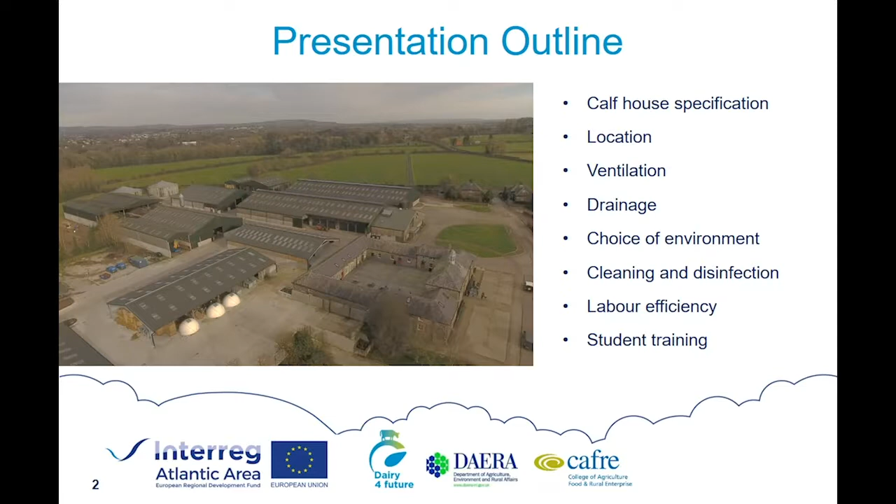This evening, I would like to talk to you about the design of the new CAFRE calf house and the post-weaning heifer house. My presentation will cover the specification of the CAFRE calf house, where and why it is located in the farmyard, the ventilation and drainage within the house, the choice of environment available to the calf, cleaning and disinfection, labour efficiency measures incorporated into the design, and training of students in the new calf house.

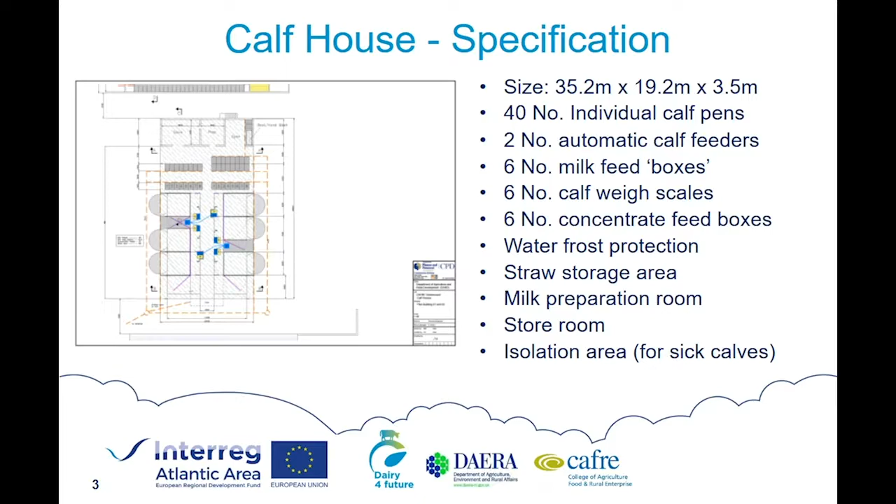The calf house has dimensions of 35.2 metres long by 19.2 metres wide, with eaves height of 3.5 metres. The specification includes 40 individual calf pens, 2 automatic calf feeders, each servicing 3 milk feed boxes and 3 concentrate feed boxes. Each milk feed box is also equipped with calf weighing scales. There is also a straw storage bay, a milk preparation room, a store room, and an isolation area for sick calves.

Turning to ventilation. Ventilation in calf houses is critically important to remove disease-causing organisms from the calf house to minimize the risk of disease infection. Good ventilation also removes excess moisture, keeping the calf house dry, which also reduces the survival of disease-causing organisms.

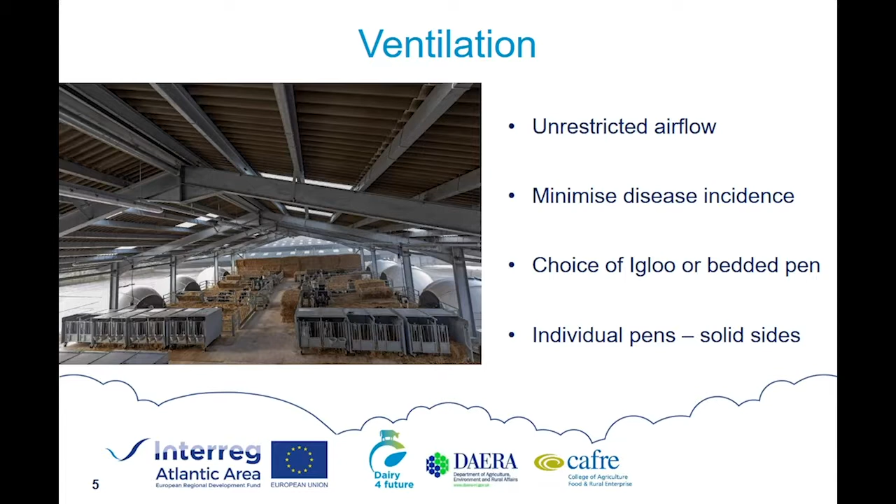The igloos are designed according to the manufacturer, so that wind blowing over the igloo creates a negative pressure at the highest point, drawing air out of the igloo through the ventilation outlets that you can see on the top. The ratio of the size of the inlet area at the front of the igloo to the size of the ventilation outlets on top is designed to result in slow, draft-free air movement within the igloo. From having released smoke pellets in the igloo and watching the smoke movement, the effect appears to work as described.

In the second presentation tonight, my colleague Aaron Brown from AFBI will discuss some of the ventilation issues found in calf houses on local dairy farms participating in the Optihouse research project.

The deep straw bedding that you can see in the slide also provides calves with the opportunity to nest into the straw, creating a localized microclimate for itself. In addition, calf jackets also give the young calf additional cold tolerance protection.

Calf jackets have been researched by AFBI, Teagasc and the AHDB, evaluating whether jackets improve calf health or performance. The research in general indicates no significant impact on calf performance or health, but what the local AFBI research did show was that calf skin temperature was approximately 6 degrees higher for calves fitted with jackets, indicating that fitting calves with jackets for the first 4 to 6 weeks should help calves manage cold weather conditions. However, where calf jackets are used, provision must be made for cleaning the jackets before reuse to avoid disease spread.

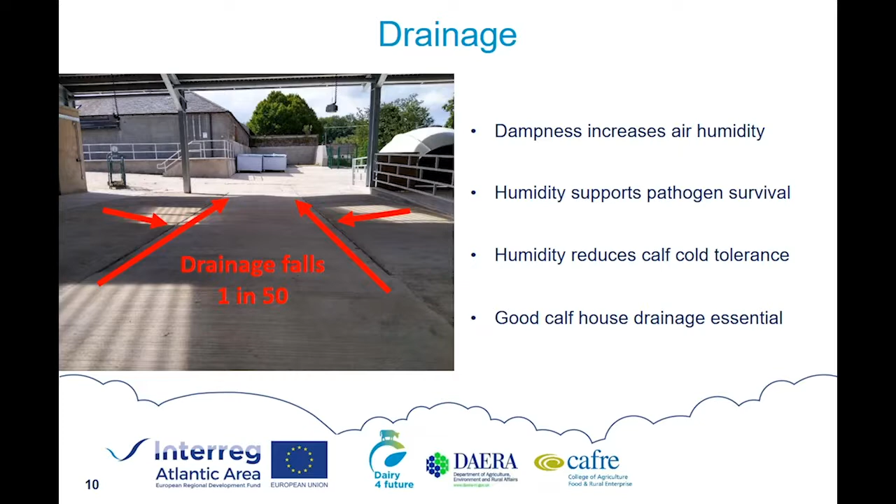The image on the screen shows the concrete floor area of the calf house where the individual calf pens are positioned. A 1 in 50 fall has been created from the back of the calf pen to the front, indicated by the arrows pointing from left to right and from right to left, with a further 1 in 50 fall from the centre of the calf house to the outside.

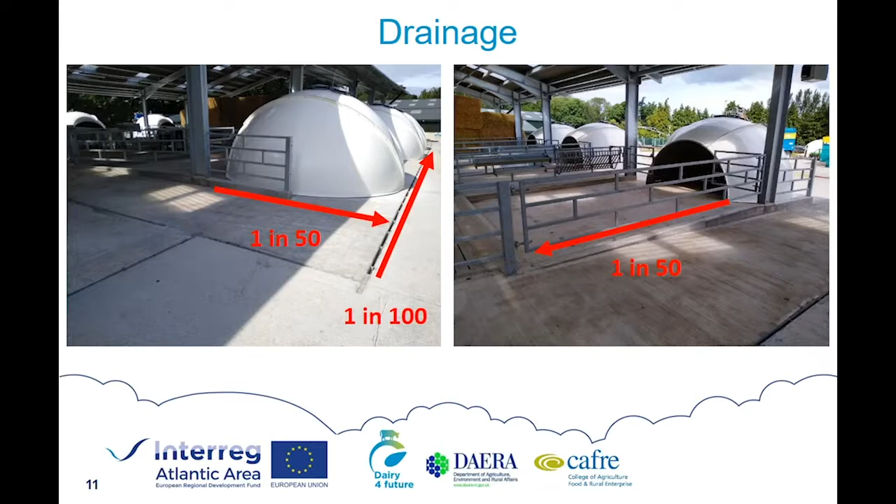Within the igloo pens, there is a 1 in 50 fall under the igloo, with a drain placed just behind the igloo to catch any dirty water runoff. There is also a 1 in 50 fall from the front of the igloo through the bedded pen area.

This fall drains liquid towards a shallow slurry channel at the front of the pen, which is covered with 2 metre wide slats, raised 150 millimetres above the bedded pen floor. This gives a solid concrete curb against which the dirty bedding can be loaded when the pen is cleaned out. Holes are drilled at 500 millimetre intervals to drain the liquid to the slurry channel. The channel has a fall of 1 in 100 along the length of the calf house, and the slats have a narrow 15 millimetre gap width suitable for young calves.

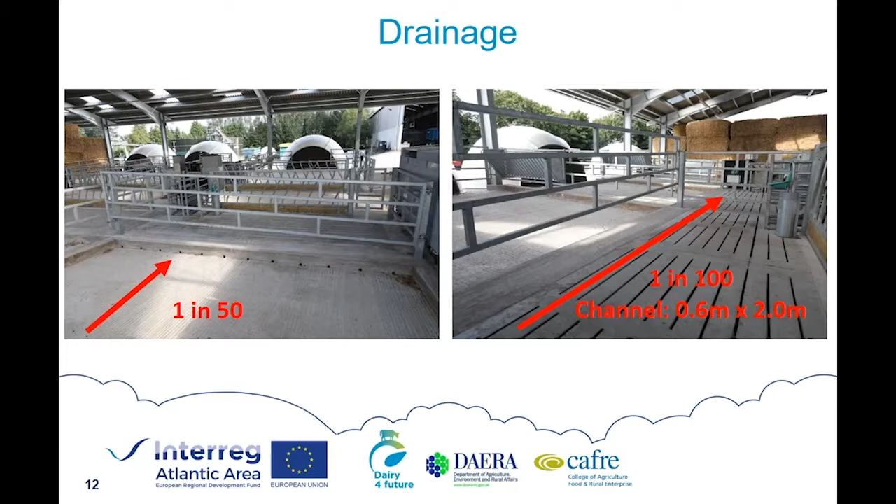Past experience indicated that the dampest area of an automatic calf feeder house setup is around the milk feed boxes. For this reason, the automatic calf feed boxes are located over the slurry channel slats to keep the pen floor areas clean and dry.

In terms of cleaning and disinfection, all calves are placed in individual pens for the first 7 days of age to allow the calf to be fed its dam's colostrum for 4 to 5 days before it is transitioned onto milk replacer. More information will be given by my colleague Alistair Boyle in the second of our series of webinars on calf feeding.

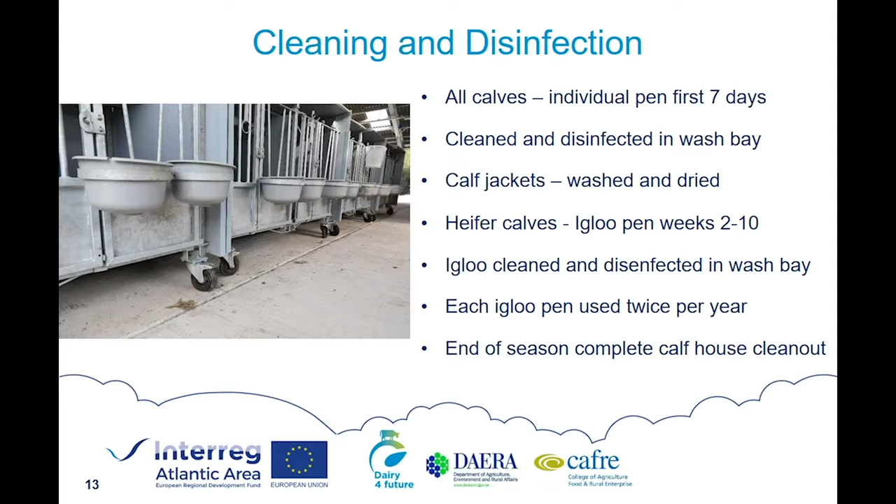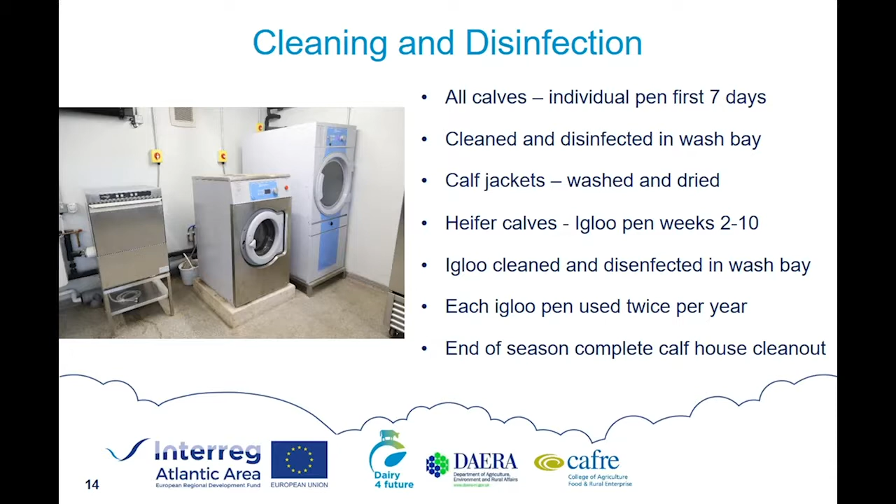Replacement heifer calves stay in the igloo pen from weeks 2 to 10. They are weaned off milk replacer in the igloo pen and ideally stay in the igloo pen for another 1 or 2 weeks post-weaning before being moved to the post-weaning cubicle house. After each igloo is emptied, the igloo is lifted out of the house using the hook you can see on top, taken to the wash bay and thoroughly washed and disinfected before being returned to the calf house.

The dirty bedding is removed using a farm shovel and taken to the midden. The concrete floor under the igloo and bedded pen is then thoroughly brushed out. At this stage, the pen is not pressure washed to avoid wetting the rest of the house. Each igloo pen is generally used twice during the calf rearing season. At the end of the season, the house is completely cleaned out, disinfected and rested again before the new calving season. On farms with year-round calving systems, design provision would need to be given to creating a break period when calf housing can be thoroughly cleaned and disinfected.

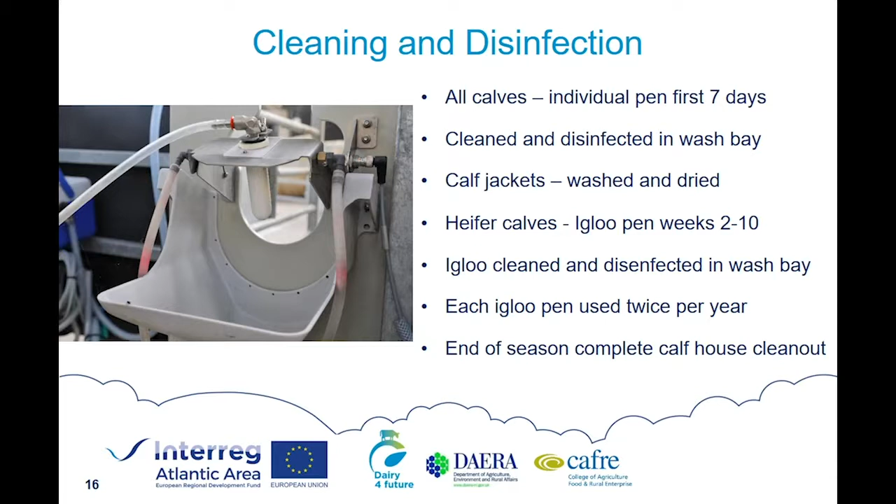Additional hygiene provisions specified in the design of the calf house include automated milk replacer teat cleaning, which you can see on the slide, and an industrial washing machine for washing milk bottles. Stainless steel sinks and flexible tops have also been provided to make it as easy as possible to clean milk buckets and water bowls, etc. Hygiene and its impact on calf performance will be discussed in much more detail in the third of our series of webinars with data again from the AFBI Optihouse research project.

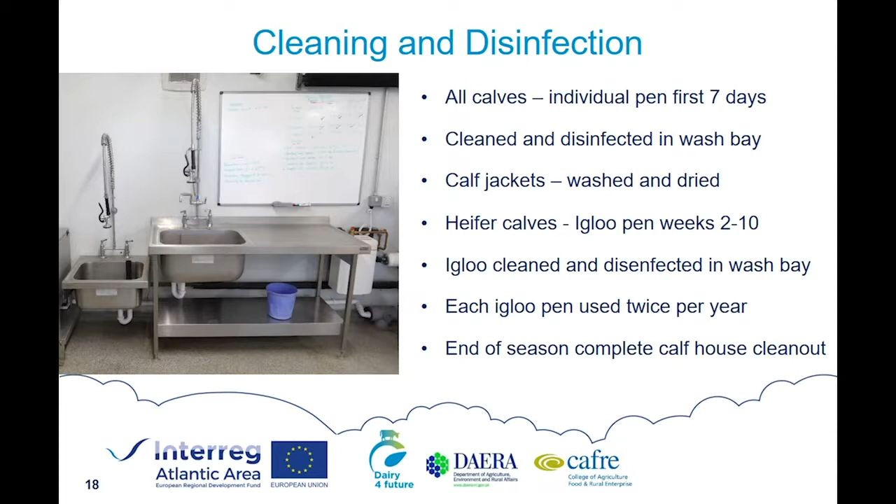Turning to the subject of veterinary medicine storage, vaccines are a big news story at present for obvious reasons. For the human coronavirus vaccines to be effective, they must be stored and handled correctly at specified temperatures. The same applies to cattle vaccines. CAFRE has a strict vaccination protocol to protect replacement heifer calves against pneumonia, which will be covered in our third webinar in early December. To store our vaccines correctly, we have installed a small wall-mounted medical fridge, which you can see in the image on the slide. Alongside it is a lockable medicines cabinet to ensure that we meet our quality assurance standard responsibilities.

Going forward, all calf treatments will be recorded in new dairy herd management software, accessible to students and staff through smartphone apps. These electronic records will be much easier to use and to review with the college vet to assess where we can improve our disease management practices going forward.

In terms of labour efficiency, calf rearing can be a time-consuming aspect of dairy herd management. This new calf house has improved labour efficiency on the CAFRE dairy farm in a number of ways. Firstly, by bringing all the young calves into one location on the farm.

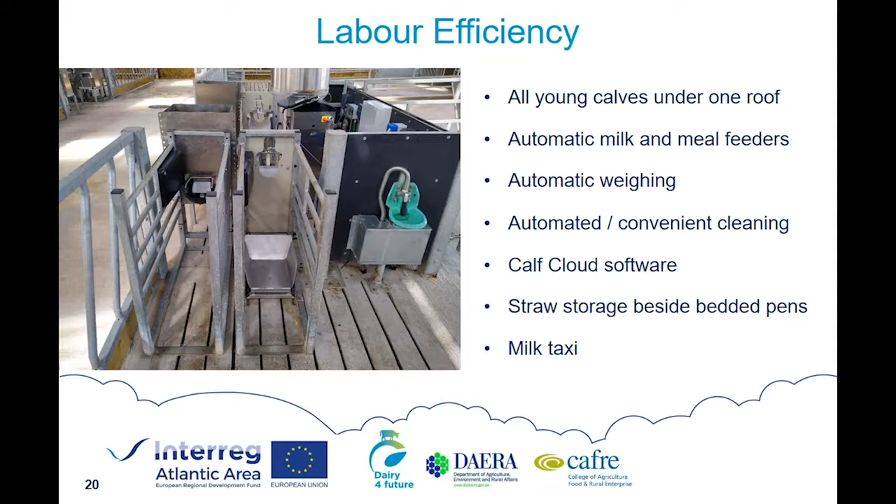The milk feed boxes are each equipped with half-body weigh scales, which automatically weigh each calf as it feeds. This data is readily available through the Calf Cloud software, freely available with the automatic feeders.

The accuracy of the automatic weighing has been checked a number of times by CAFRE students, and we have found a very strong correlation between the automatic and manual weighings, with over 90% of any variation between the 2 methods explained, statistically speaking.

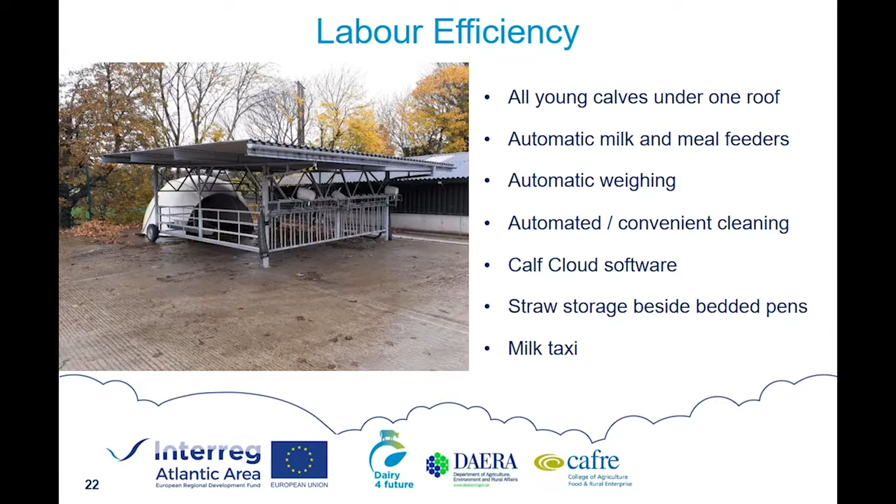We have retained the igloo and veranda we purchased in 2017 to trial the system, and we plan to use it as an overflow area for some of our beef calves. To demonstrate labour efficient calf rearing to our students, we have purchased a milk taxi which automatically mixes milk replacer and dispenses it in a controlled manner both to calves in the veranda and to calves in the individual pens being transitioned on to milk replacer.

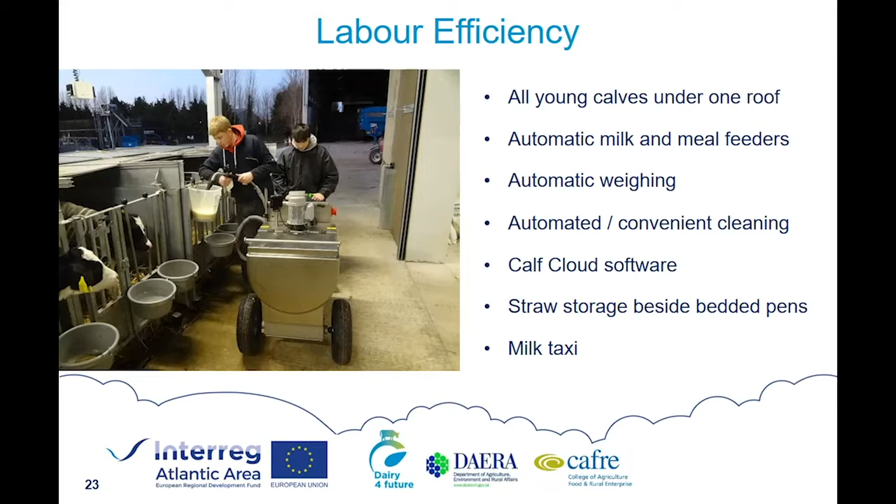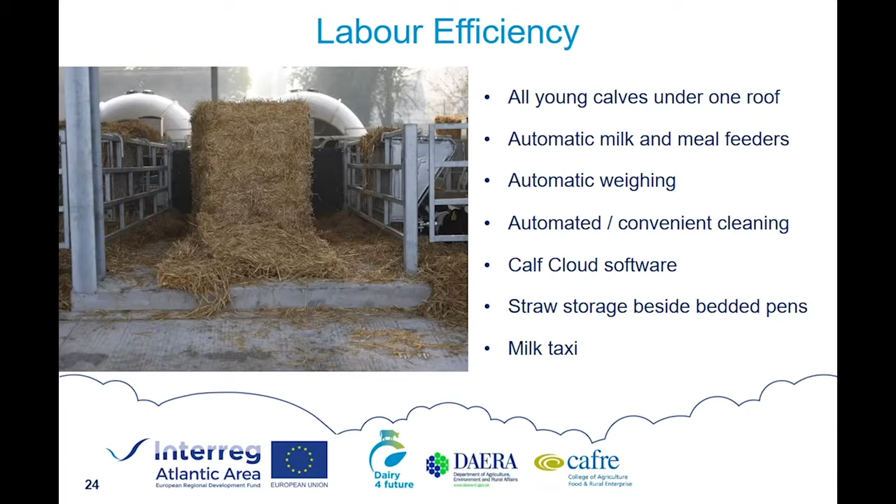The commercial bottle washer and convenient washing facilities described earlier also add to labour efficiency, and investments of this nature on farms to make cleaning easier and quicker could make considerable improvements to hygiene practices on farms. Convenient storage of straw, as you see in the image on the screen, beside and between igloo pens, makes straw bedding easier and quicker, and also helps keep the calf house cleaner.

We are currently increasing our use of sexed semen on the dairy herd, and we monitor our breeding records closely as we go through the breeding season to try to minimise the number of Holstein bull calves born on the farm and to maximise our beef cross calf value.

The post-weaning heifer shed has dimensions of 35.2 metres long by 19.2 metres wide, with eaves height of 3.5 metres. The shed contains 84 calf cubicle places, each 1.5 metres long, with divisions spaced at 0.9 metre centres, or 5 foot by 3 in old money. The cubicle beds are covered with a continuous length of mat for comfort and insulation.

The passages have solid floors and are scraped by a chain-driven scraper to a small slurry tank at the north end of the building. The scraped passage floors have a 2% slope to the centre and a 1% slope from south to north to drain liquid to the slurry tank.

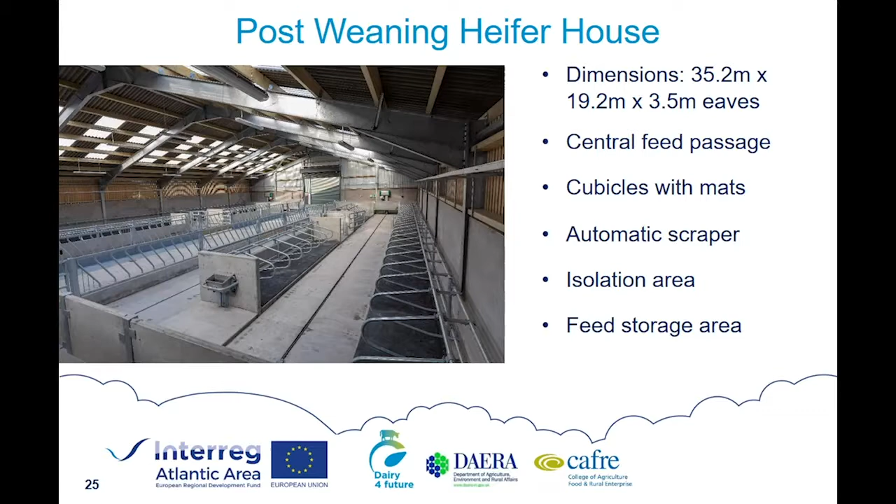Prior to weaning in the calf house, the calves are introduced to good quality grass silage placed in the passage in front of the igloo pens. My colleague Alistair Boyle will discuss the weaning process in more detail and the rearing performance of heifer calves from last winter and from this season to date in the second webinar next week.

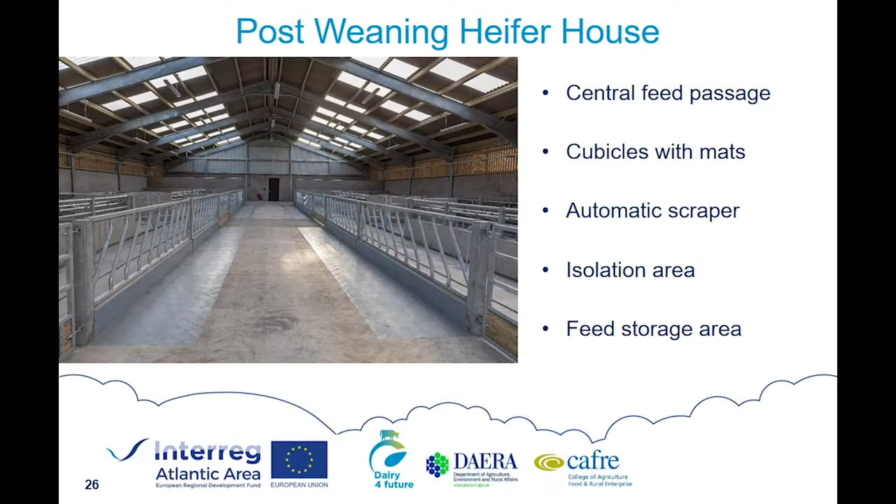An isolation pen and a concentrate feed storage area have been incorporated into the south end of the shed. All lighting is LED. An open covered bay has been constructed at the south end of the shed for demonstration purposes during open days, hopefully in future. Handling facilities are next door in the mating heifer house, where students weigh the heifers to monitor post-weaning performance.

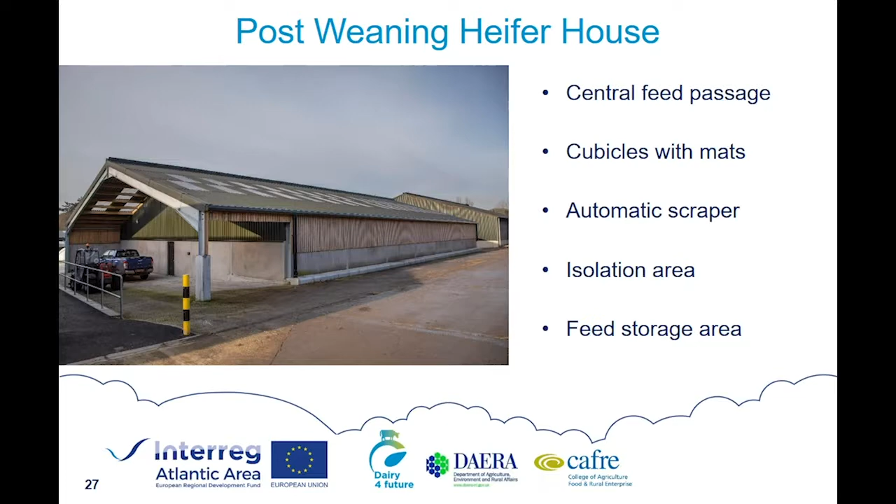As already mentioned going through my presentation, student training is an integral part of everything we do at CAFRE. Squads of students are involved each morning and evening through the working week, and the students are trained in all aspects of calf management, from calving skills to operating the new high-tech feeding equipment, administering vaccines and keeping health records, and the more mundane but essential tasks of cleaning equipment and utensils before and after use.

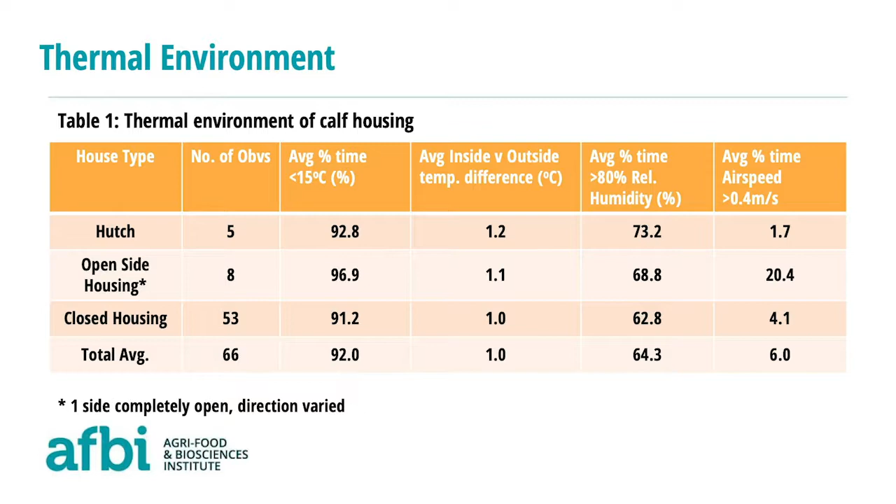In terms of ventilation, there's two main purposes. Number one, we want to bring in fresh, clean air and remove the contaminated air. Number two, we want to remove moisture and create as dry an environment as possible. That's certainly a target for me in calf housing, a dry floor and maintaining a dry environment where pathogens struggle to survive as long. And we want to target fresh air for all calves at all times, and I'll talk briefly about naturally ventilated houses and where the limitations are.

90% of the calf houses within this study are naturally ventilated. Very few of them were running with tubes, and some of them that had the tubes in weren't even running them. Average volume per calf was 21.6 meters cubed, so in general quite high. There are benefits in that if you're keeping animals up to 4 or 5 months of age in that house. But if they're only pre-weaned calves, I would say that it's fairly generous. As a minimum, you're looking at 6 meters cubed per calf less than about 100 kilos.

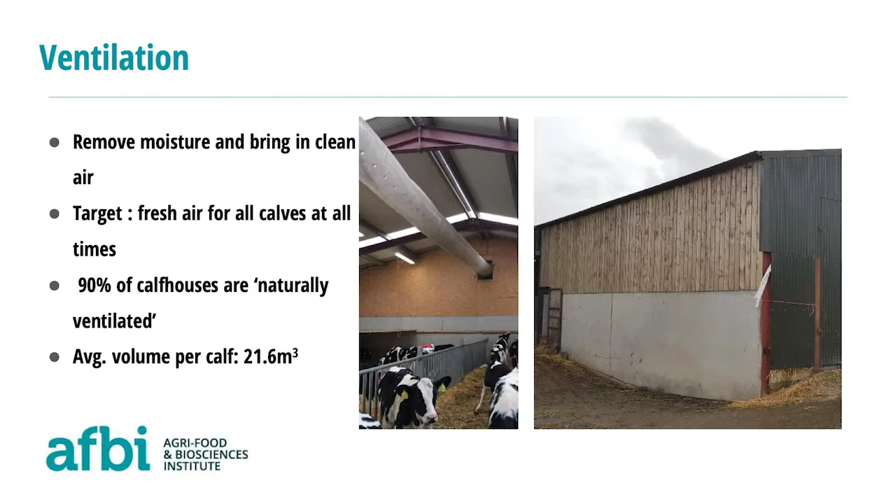Quickly now looking at the two different types of housing. Naturally ventilated on the right, which is a space boarded house, or you could have Yorkshire or double cladded, and then on the left a positive pressure tube, which would deliver air at all times. In terms of naturally ventilated houses, there are targets we could use to maximise their efficiency. Now, as I've written there, in an ideal world, because there are certain scenarios where we cannot meet all these, and there are farms built in certain areas. And I know there's farmyard planning, there's a lot of other things that have to go into it.

But in terms of designing a house, the things I'd be thinking of trying to avoid or trying to design: certainly the first one will be the situation of the house, and Martin mentioned that earlier. The prevailing wind side of other livestock buildings, not only because we want to minimise contamination from other livestock, but also so that you're not having other barriers blocking the run of wind to that house, and there aren't wind channels and things affecting that.

Not only that, but the orientation of the house. So I would ideally have the longitudinal side, the long side, facing the prevailing wind direction. If you have a mono pitch, put the back of that to the southwest, ensuring that we get as much that is equal across the house as possible, and we're not blowing air up through the house across the ends of calves.

And then the topography, which I think is probably the most important one for me, is where we're building. If we're going to naturally ventilate a house, avoid hollows. Some of the research goes back as far as foot and mouth, when they were seeing that the foot and mouth virus was particularly prevalent in animals in houses built in hollows. The virus seemed to be moving in air plumes along valleys, and if you think about your fog, your mist that's lying in the low-lying areas.

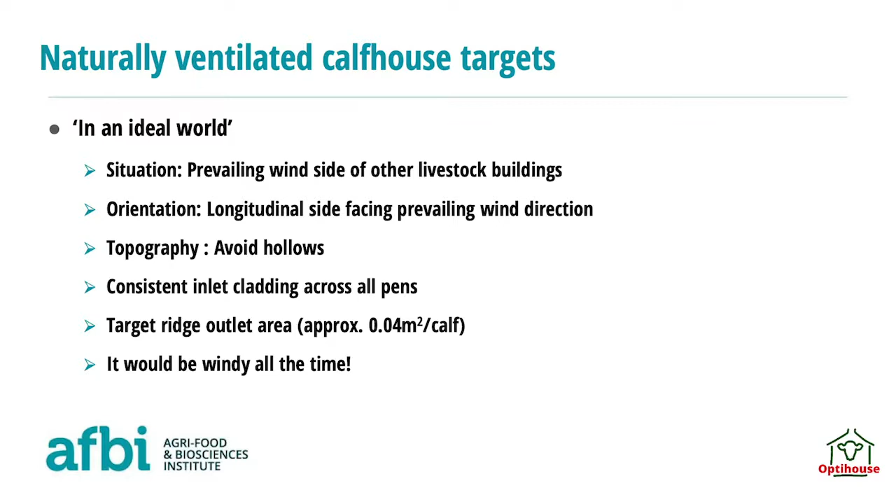So looking quickly at how we're calculating the ventilation requirement of those buildings. We measured up the outlet area of the building. For outlet, we're talking about that 0.04 meters squared per calf, and in terms of inlet, we would like that on each side of the house, so in total double that. And this is the way we're calculating the requirements of that building based on the animals.

We're using the AHDB methods for that in cooperation with Jamie Robertson of LMS and the techniques that were built up from the SRUC previously. This takes into account the building area, the roof pitch, so the steeper the pitch the more effective, the stocking density, and the live weight of the animals in the house.

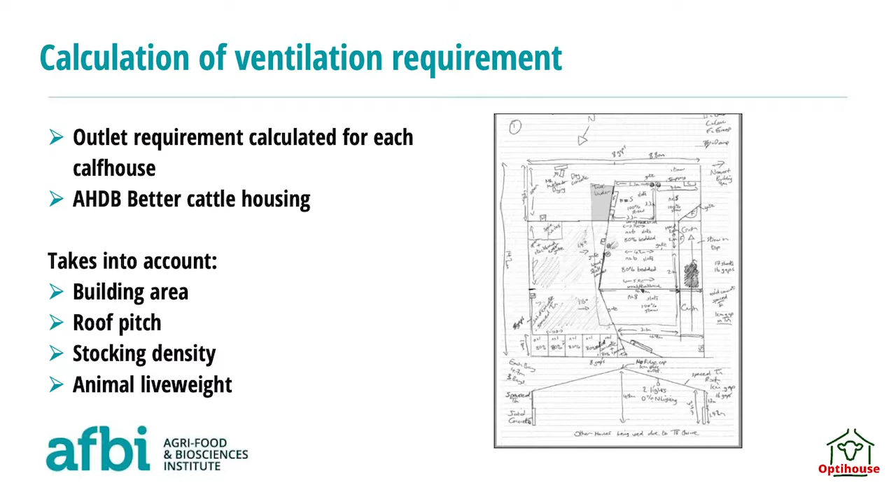On the other side of the spectrum, you've got 15% of the calf houses that had over 200% of their requirements. So basically, the outlet is double or more of the size that it needs to be. And particularly as a trend I would see with newer calf houses that are going up more recently, is the sort of trend to overcompensate for outlet area, and in a way that in itself can become a hindrance. If it's too large, you'll end up having a ridge whereby your wind's going over the house, and rather than pulling air out of the house, it's blowing in and disrupting the whole thing entirely.

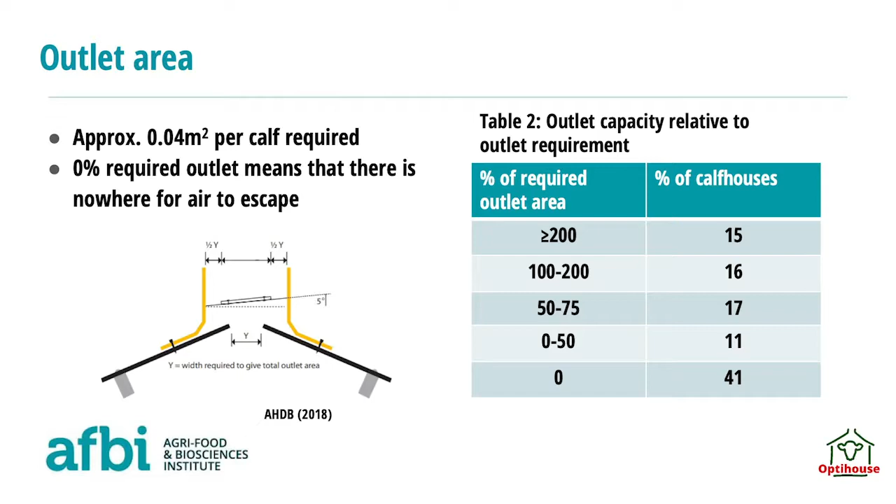And there's also a need for the right sort of design that's creating that pull rather than facilitating wind coming through the side. Okay.

Looking then at drainage, so obviously a variety of floor types within the calf houses. The majority with a solid concrete floor, which we would really need a slope on. And then 33% of the farms with the concrete run onto slats, and 9% with a sort of permeable surface, whether that be gravel under straw, or wood chip.

So obviously a slope on a solid floor is very much essential to manage moisture. Otherwise you're collecting it. And I would use the figure of a 1 in 20 slope designed to allow for that. 92% of the floors that were measured were less than that 5%, 1 in 20 slope, and that's obviously a major risk in terms of getting the moisture away. Certainly, trying to remove the moisture the calf's producing to maintain a dry floor, not only from the point of reducing the moisture in the air, but also in terms of your disease management.

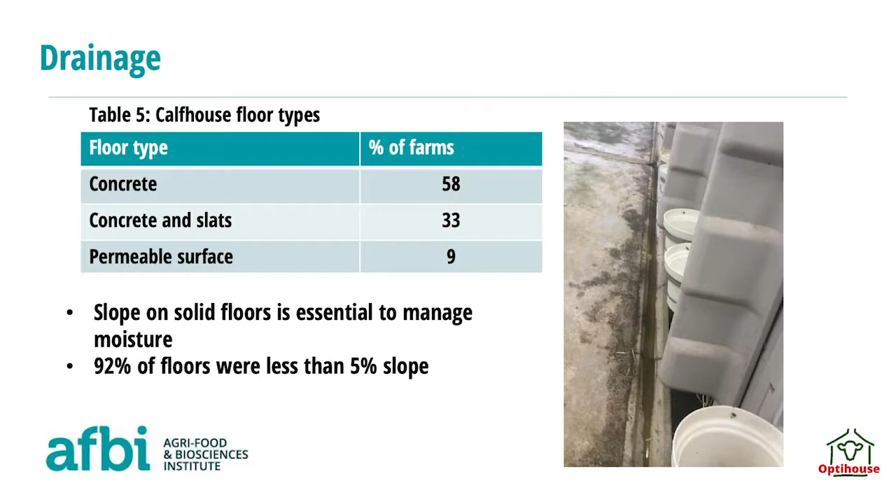In terms of lighting, it's not something that's often touched on, and to be fair, it's fairly simple. In terms of the benefits to calves, as lighting's increased, in previous studies, and there hasn't been many studies done on light, as you increase from 20 lux to 130 lux, there was an increase in these calves' feeding behaviour, and that's increasing in terms of starter intake. And again, as we want to start weaning our calves off, we're very conscious that we want them to be eating starter at this stage, and an increase in social behaviour.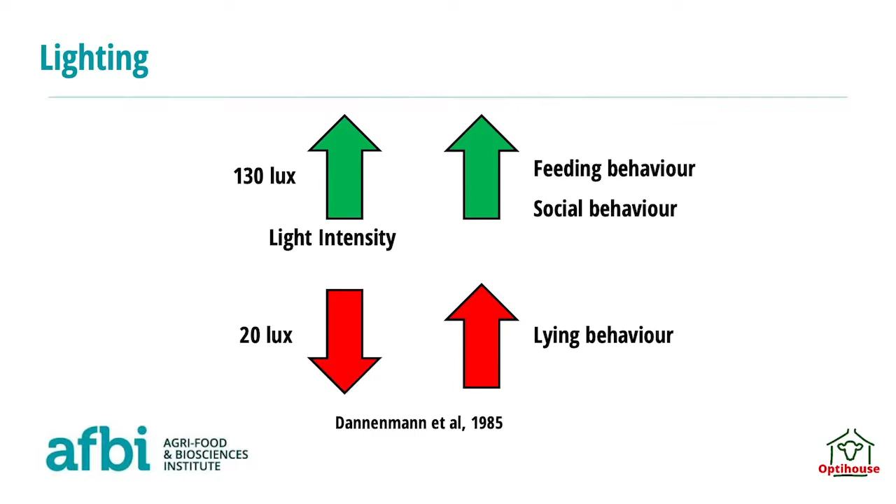Then in the lower light intensities, there was increased lying behaviour. And other studies that have looked at increasing the light period and things like that have also seen the same trends towards increased dry matter intake and reduced lying times. So as a general target, I'd be targeting at least a minimum of 100 lux. I know the AHDB for older heifers will be looking at 170 to 200 lux, as you're coming towards puberty.

23% of the calf houses had no natural lighting on the roof, and that doesn't take into account the sides, but in general, natural light, the fact that it's free, I would be trying to take advantage of that, and to create that environment that calves are wanting to get up in, especially as they come up to weaning.

In terms of what we're seeing on farm here, there's averages here when the lights are turned off across several pens, and when the lights are turned on, and the lights turned on would exclude hutches, so you'll notice a discrepancy there with the averages on and off. So on average, you're talking sitting near 600 lux when the lights are on, but down at a minimum of 8 lux, which really isn't a very functional lighting system for any calf house.

And I would be urging, it's not the most difficult thing in the world. It's very straightforward, but it does have an impact. And 20% of the farms when the lights are turned on were below that lux target. So there is room for improvement there. If that's your calf house, it's something to take into account. You'll see there the max with the lights off is 12,447. That's a transparent, older design of a hutch, and certainly some of the newer designs will be a bit more opaque than that, and will be more insulative as well.

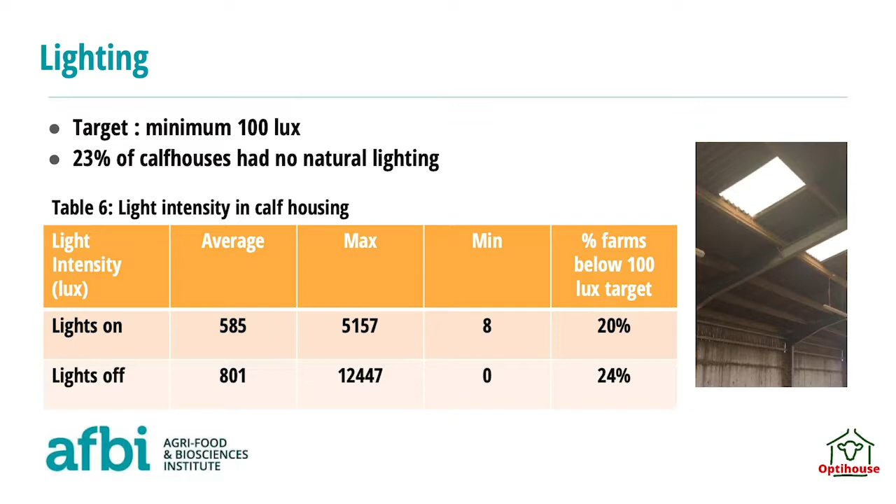And then also the drain was put in on the left hand side of the passage, in front of those left hand pens. The idea was to improve moisture control, to improve the quality of the air, and certainly this farm had a previous issue with pneumonia, from the season before where they lost 5 calves with pneumonia, having lost none this year, and with very little medicine usage over that winter period.

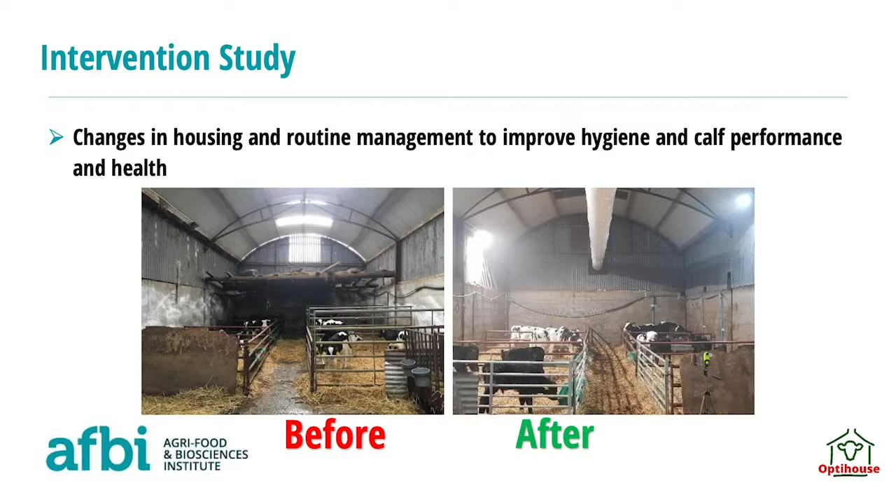There's no change in the diet in that time, so there hasn't been much apparent difference in the growth rate of calves, and that's the same with this farm here. This is quite a large change, as you can imagine. There's a whole wall missing there. This guy was having more of an issue with scour, and during the months of January and February, he's having issues with 50% of the calves as he got to the end of his calving season. So not only has he taken that wall out, he's raised the height of the wall at the back to allow natural ventilation. He's on a particularly exposed site on the east coast, and that allows a fairly consistent flow of wind coming up the hill at him.

And not only that, he's added the drainage there in the floor, and he's changed his pen design, and he's actually gone, something I'm particularly fond of, to painting the wall white. Not only making something easier to clean, but also improving the light in the house.

And again, he's gone from having a lot of issues with scour in that time to having very few, and having, I think, within the single figures in terms of treatments. And then I think he only lost 1 calf that last season, as opposed to about 1 or 2 calves per month, which was the previous situation.

So finally, just some take-home messages. In terms of, I mentioned at the start of it, the temperature. Certainly, non-housing management is required to deal with the lower critical temperatures, because there isn't much difference between the inside and outside temperatures of calf housing. Certainly, we need to minimise draughts and minimise dampness. But we do need to feed our calves appropriately.

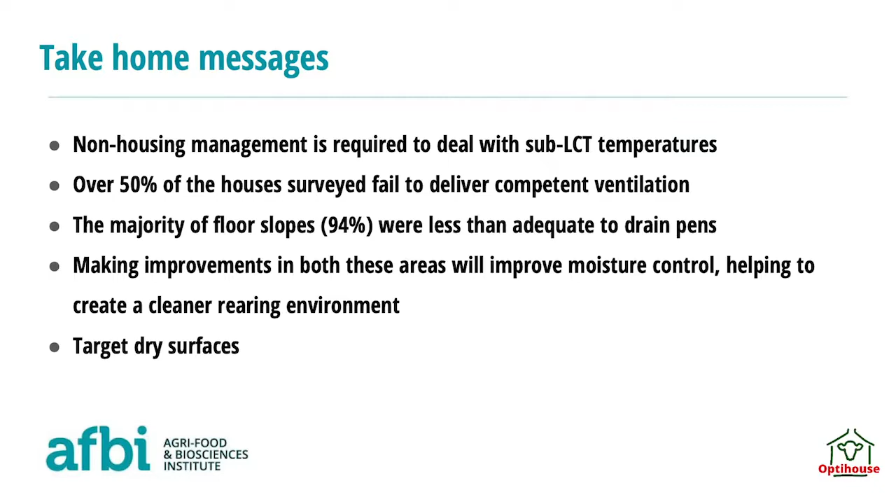Thank you very much. I'll leave it back over to Dawn. Aaron, thank you very much. And you went through an awful lot there in a relatively short time. I appreciate, folks, we're approaching 9, and I talked about finishing at 9, but we'll try and get around at least 1 or 2 questions to each of the panelists quickly. And thank you to those that have sent in questions. If there are any last-minute ones, we'll try and get them fitted in.

Most of them follow a theme, and I might start with Michael, because you've had it easy so far, Michael. So I'll ask you to unmute. Probably the main feature of the CAFRE house is the fact that it's got that open plan, open sides. Do you think that open plan calf house is suitable for most dairy farms in Northern Ireland?

I think, Dawn, it has worked very well in our situation, and there shouldn't be any reason, provided it's sited properly. That has been highlighted by both presentations this evening, with plenty of clean air coming up to ventilate it. The other important consideration would be the choice of the igloos. The igloos chosen for the Greenmount house ideally hold 12 to 14 calves up to weaning. And with the calving pattern, we can fill one of those igloos relatively quickly.

And it means that those calves are of the one age coming through and then weaning at around the same time. That helps not only in calf performance, but getting them weaned, taking the group away to the follow-on house, and then cleaning and resting the building. So someone with a more scattered calving pattern may need to look at the igloo they choose and the number of calves they can put into it, to fill it relatively quickly, keep the calves of similar age and bring them through to weaning at a similar age and group size.